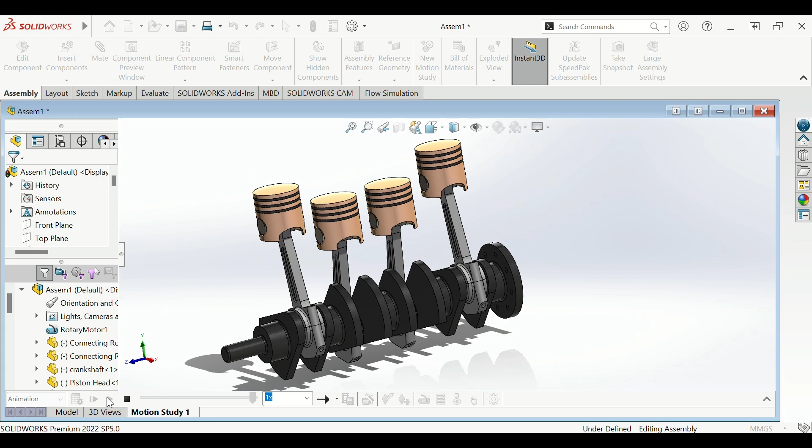Hello, welcome again. We are going to perform this type of modeling in SolidWorks. Basically, a four-piston crankshaft with connecting rods. And this is just a motion study case, but we're going to go ahead and navigate how to basically perform each and every single one of these parts.

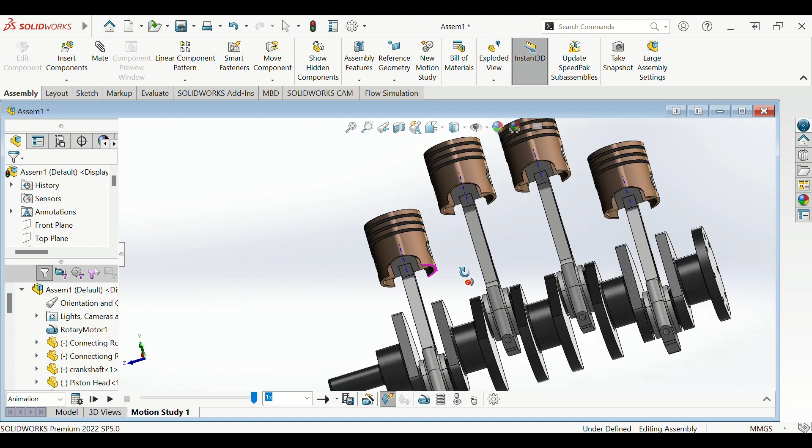And for those trying yours, here I just basically customized the color so that we can distinguish parts from one another. Okay, but if you're a person that loves engines and all this good stuff, you are basically an expert on what type of materials all these components are.

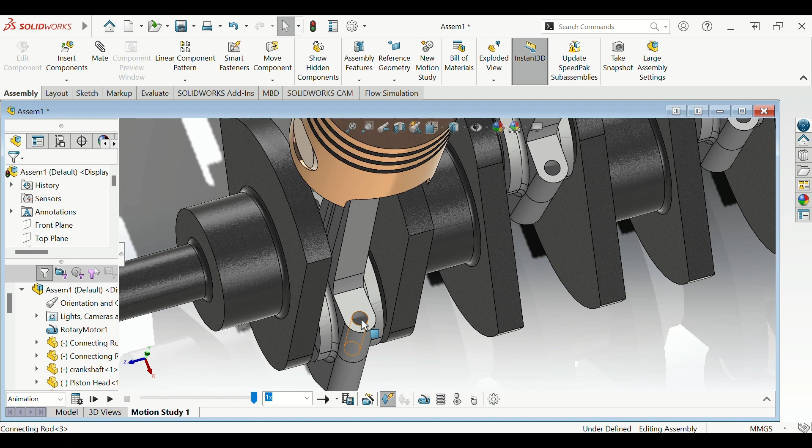And as you can see, we have holes here that are going to be missing either pins or screws. Either you have to thread them or not thread them. It's really up to you and your design, but this is what we're going to be working on. So stick around and stay tuned because we're going to start.

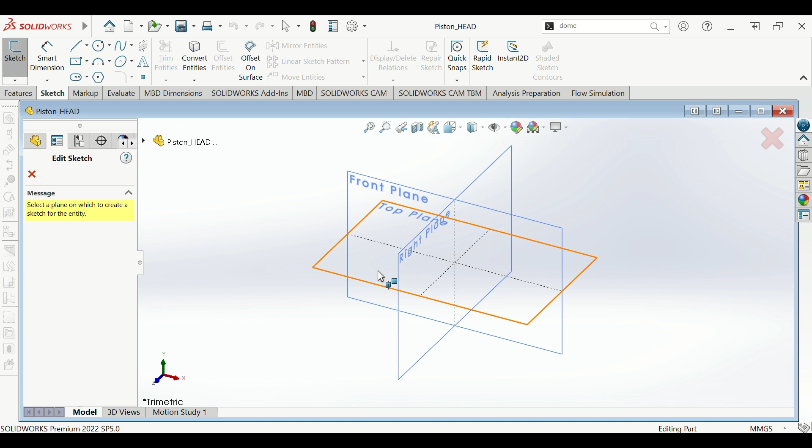So today I'm gonna open up my part in SolidWorks, and I'm gonna be using the millimeter gram second units. Okay, after I do that, then I'm gonna create my sketch, click on it, click sketch, and we're gonna use the top plane. Okay, top plane pulls up.

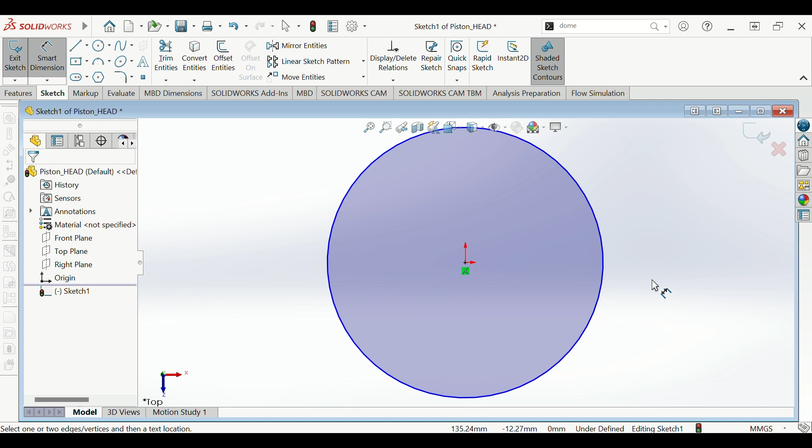All right, and if you're familiar with the piston head, it looks similar to a cylinder. So what better way than to use a circle to help us with that shape? So go ahead and create your circle. Make sure it's centered at the origin. And for this dimension, we're going to go ahead and use 85 millimeters.

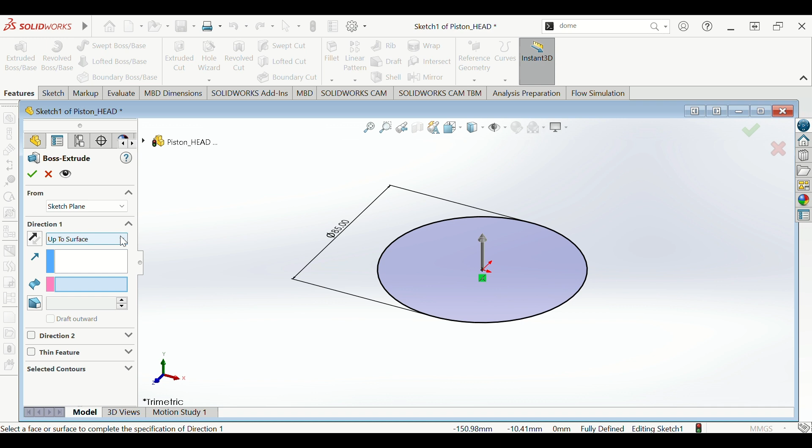Okay, now that we have it like this, we are going to use the feature of the extruded boss base, which is going to allow us to add material to our sketch. So from a reference point of our sketch plane, we're going to click the direction, and you have different commands here. So we're going to keep it with the blind one. Once you have that, your sketch kind of differs a little bit, with the yellow being a preview of what it's going to look like.

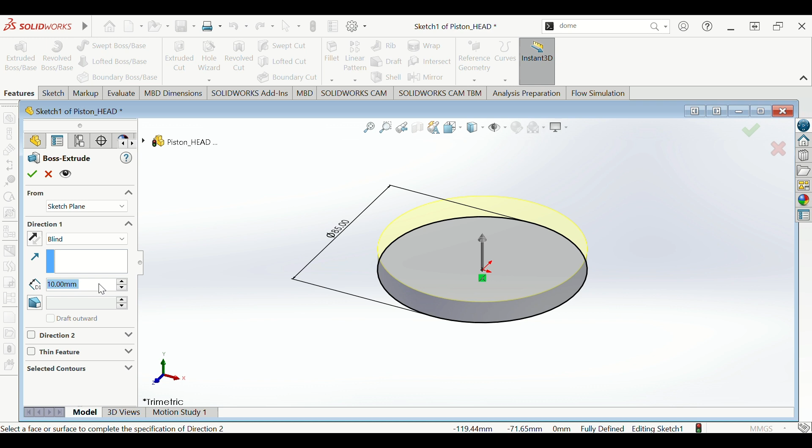So we have it set at 10 millimeters. We're going to go ahead and do it at 90. So let's click 90 millimeters. Okay, perfect. So that's what we're going to have, and that's what we like. So go ahead and click OK. Perfect.

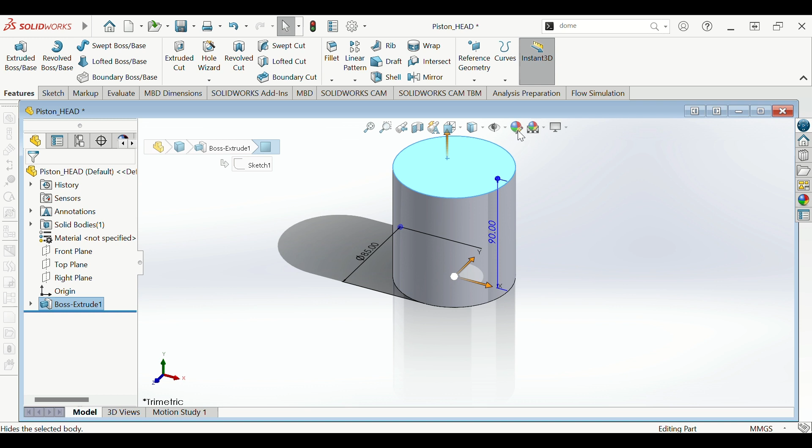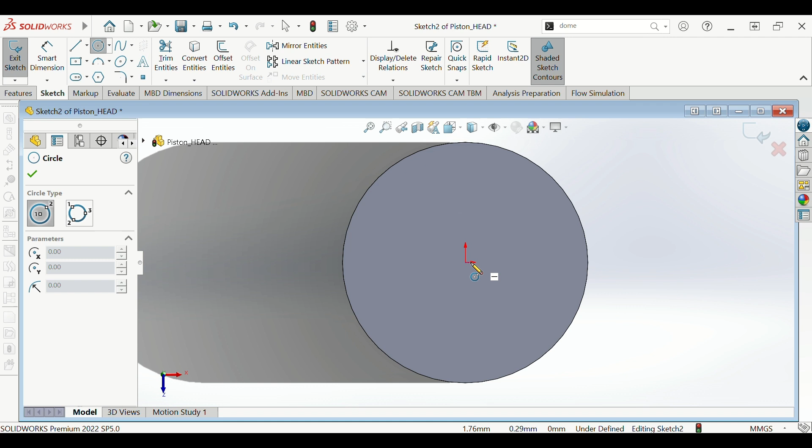So now the next thing that we want to do is create those cutouts for the piston rings. So here we have the top of the piston head. Go ahead and create a sketch. So press sketch, and then did it click out? No, it's still here. And then get the circle. Okay, make sure that it's in the middle. So concentric. I believe concentric means having the same center axis. Okay, so now we have this.

All right, so we're gonna smart dimension it, and let's see, we want our diameter to be 79. All right, perfect.

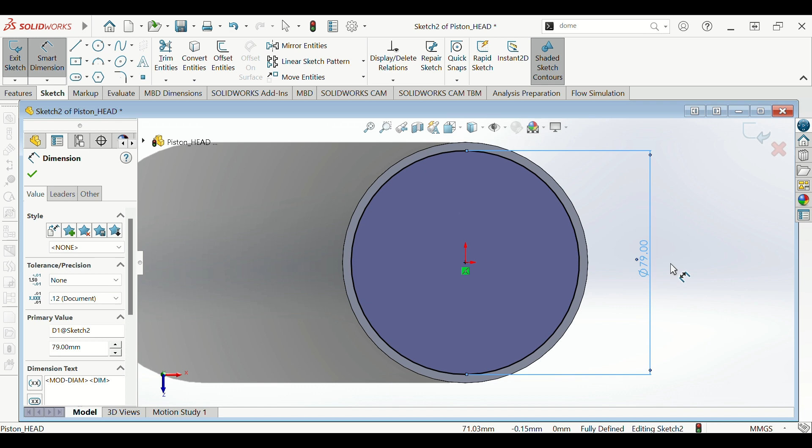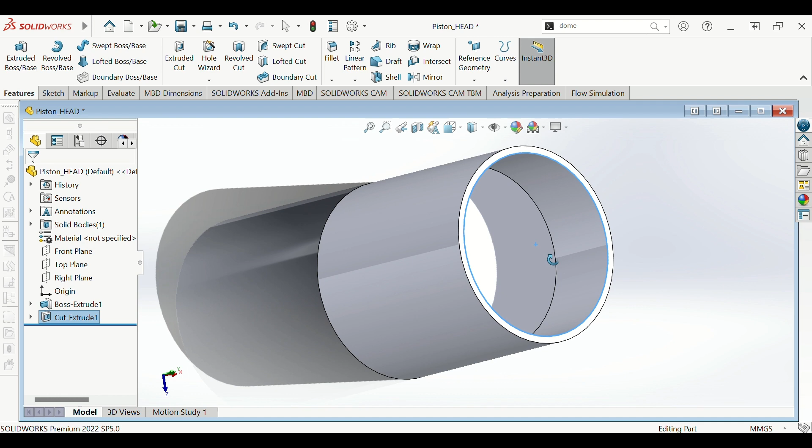Okay, so now the next thing that we want to go ahead and do is an extruded cut. And this is not your typical extruded cut that you're used to. So click on extruded cut. I'm gonna rotate it a little bit, and I'm gonna click this. Something you're familiar with, I'm gonna just do quick. It's something like this, right? Where it cuts super simple like that, but that's not what we want. So go back and edit our feature.

Okay. So our feature, we want to do it in offset. You have sketch plane, surface, face, plane, vertex, but we want to go ahead and click offset. Once we click offset, then it gives us an option of how far from the sketch plane you want it. So we want it to be, in our case,

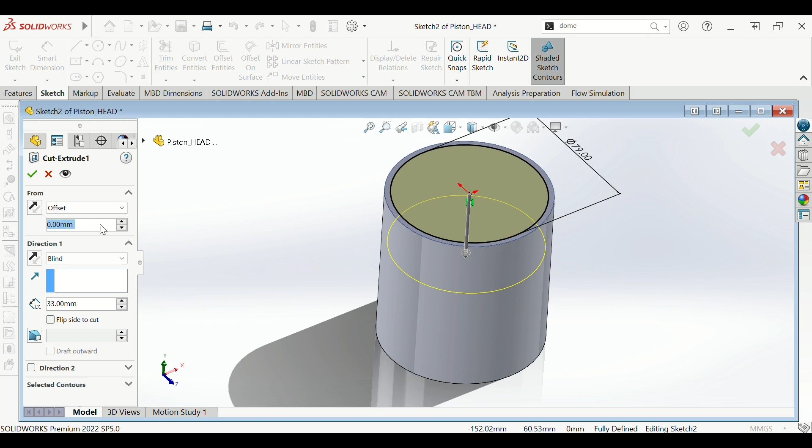7.3 millimeters. And you see, it's offset to the top, but we want it to the opposite side. We want it inwards, okay? And then direction of the blind, it's okay, we can keep that. But now for this one, it's gonna be 4.3. All right, cool.

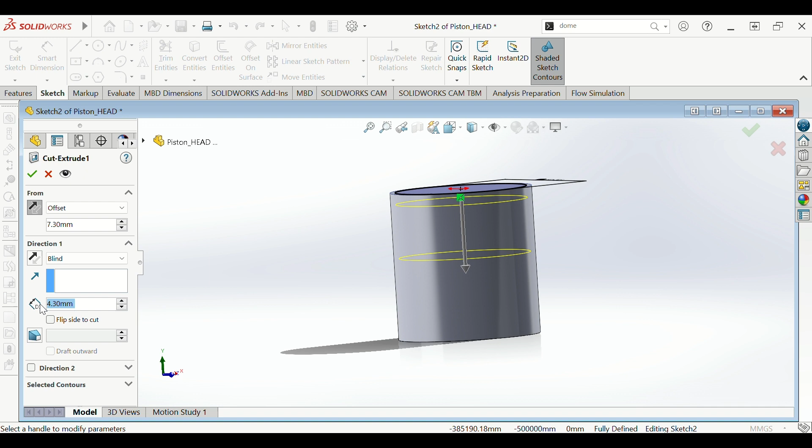And as you see, it's gonna cut from the inside, but we don't want that. So here on direction where it says 4.3 millimeters, it's gonna say flip side to cut. So we wanna go ahead and flip it. So now we have a cut towards the outside.

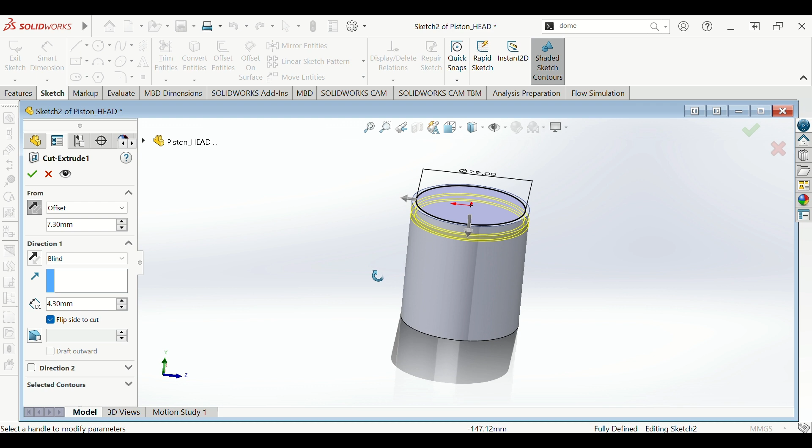Okay, so towards the outside of the sketch circle, I'm gonna press OK, and now you have this beautiful, nice cut for one of our pistons. Since we want 3 on our piston head, we're gonna go ahead and use the linear pattern.

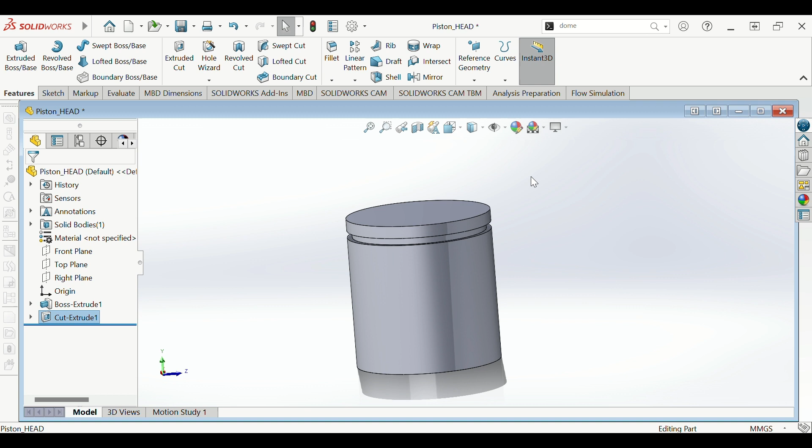But before we do that, I'm gonna click on the sketch, and here where the eye is at, we're gonna click this drop down menu and look for something called view temporary axis. Enable that to pop up because we're gonna need it.

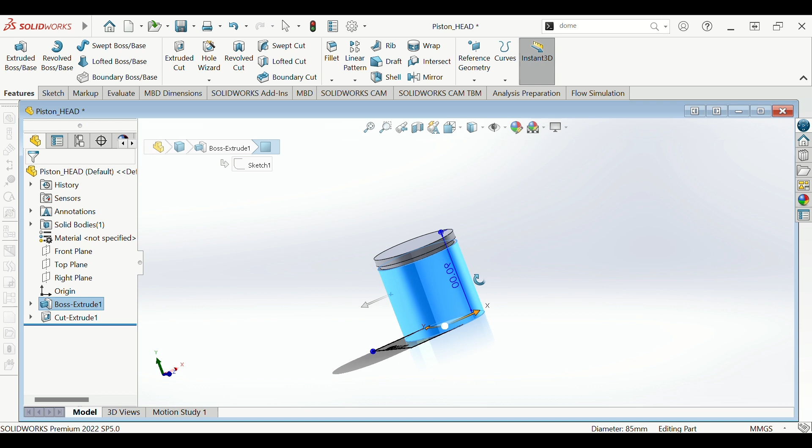Alright, so now you see the temporary axis shows right here. Let's do linear pattern. For direction, we're gonna go ahead and click the temporary axis. Now we have that.

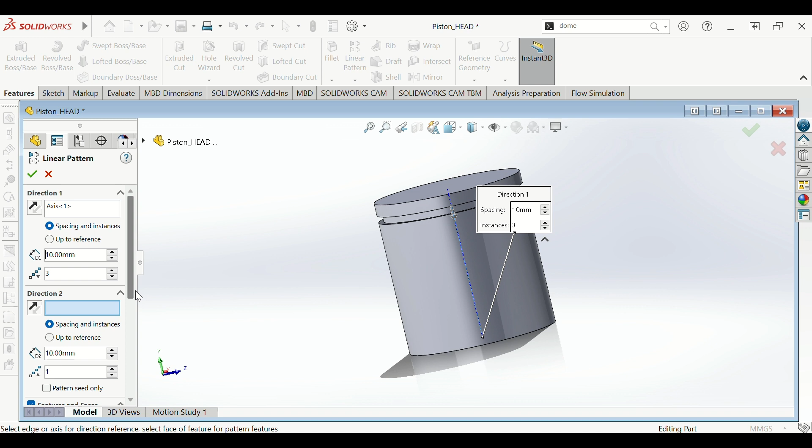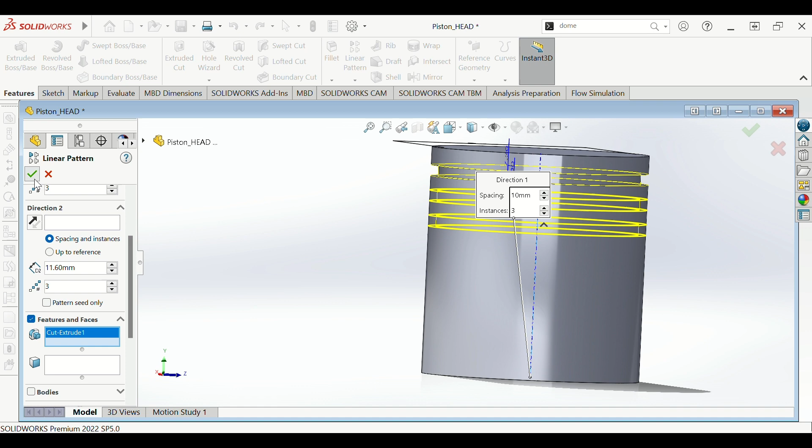Then for direction, let me see, where's the other stuff at? Features, is it here? Yeah, it's on features, what we want it to get done. The spacing, we want 3 of these. Automatically 3. But then the spacing is gonna be the 7.3 plus the 4.3 that we had, so 11.6 of spacing. Okay, now we have this beautiful, nice, good stuff for 3 piston rings.

Go ahead and eliminate the view temporary axis. Cool. And as you can see, usually pistons are kind of like, have a nice dome in here.

So where do you find dome? We go to File, View, Insert, let's see, Features, Cut, Features. Let's see if we can find the dome. If we can't find it, we can always go check if it's in curve. No, I don't know where it could be, but let's go ahead and search dome, which is right here.

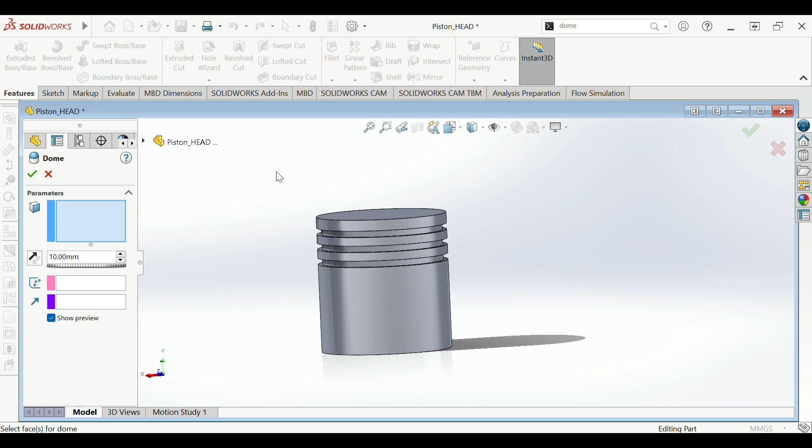Alright, so it's asking you where would you want your dome? Well, we want our dome to be at the top. Okay, so now you see this nice dome. But I think that's too much of a dome, so let's minimize it to, let's say, 5. Alright, that's kind of much better.

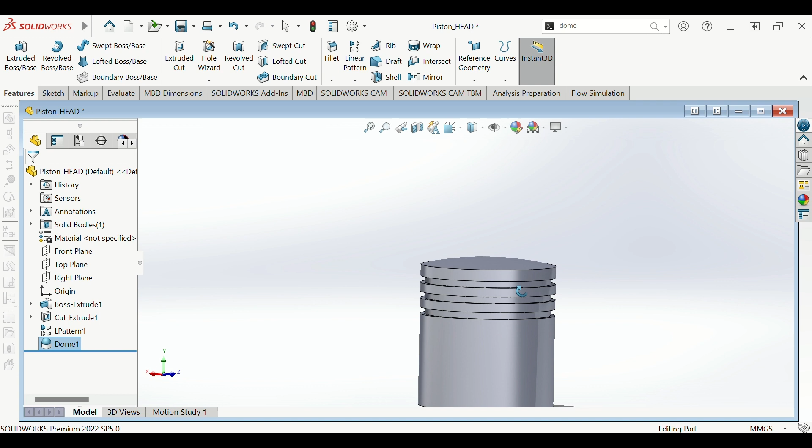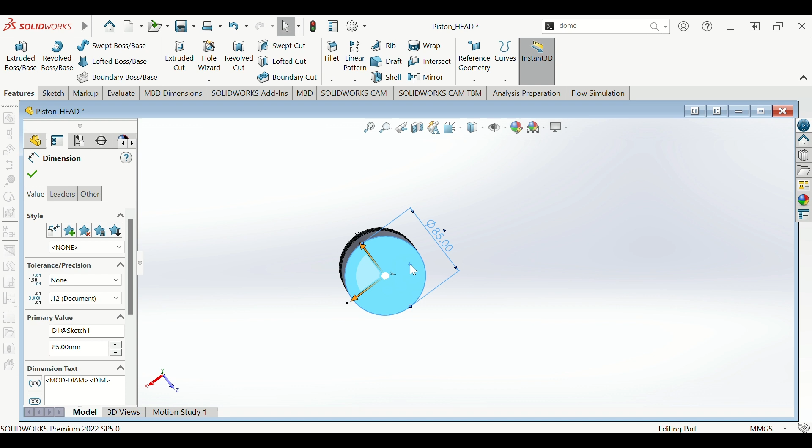Alright, cool, now we have this. So now the next thing we want to do is create other cutouts that we need, because how are we going to connect our connecting rod and pins, right? So here on the bottom surface, what is it doing all this stuff, perpendicular to this? Alright, so here we're going to cut out the inside of this.

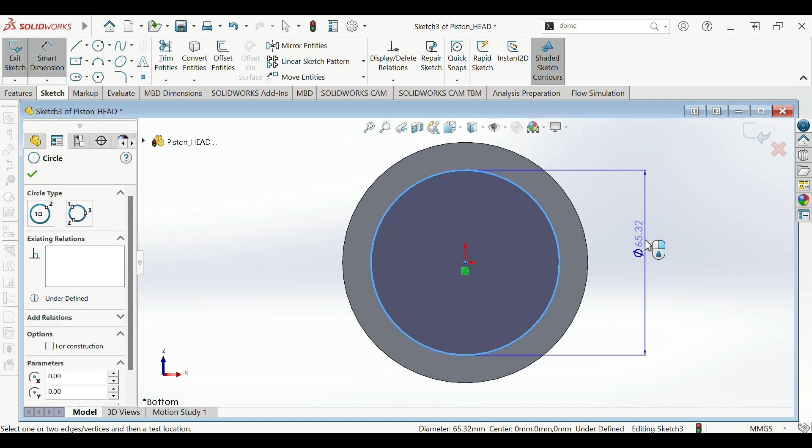So we're gonna go ahead and do sketch, circle, of course, and then we're gonna create this circle concentric to the origin and smart dimension it. What type of units should we do? So let's do 76.

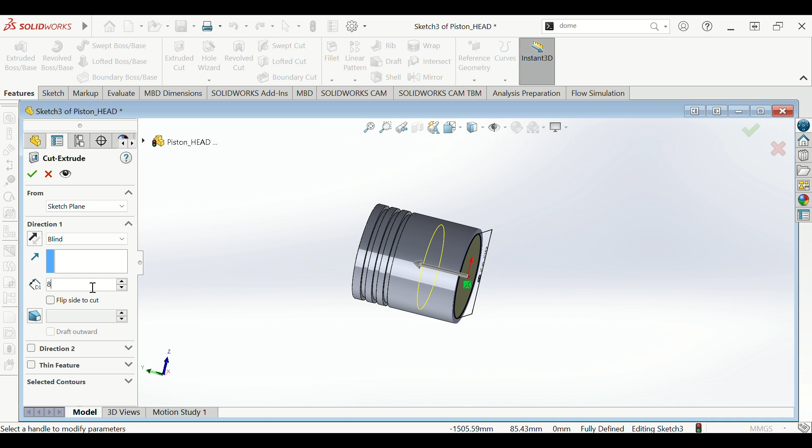Okay, and then now for this one, we're gonna go ahead and do a normal extruded cut. And the extruded cut should go all the way up to 85. Okay, alright nice, so now you can see that that's hollow inside there.

Alright, so now we're gonna move forward, we're gonna keep pushing. So let's see, front plane, top plane, right plane, front plane. Front plane is fine, this is normal.

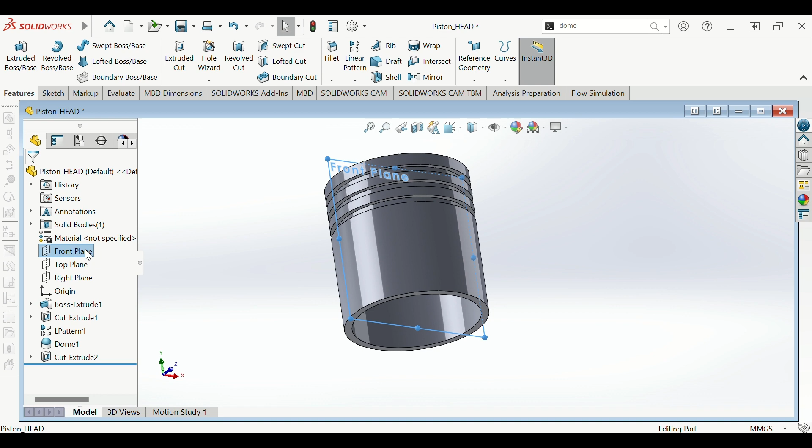Now we're gonna sketch a circle here where the piston pin's gonna go. So get your circle and let's line it up. It doesn't have to be perfect. You can always use geometric relationships.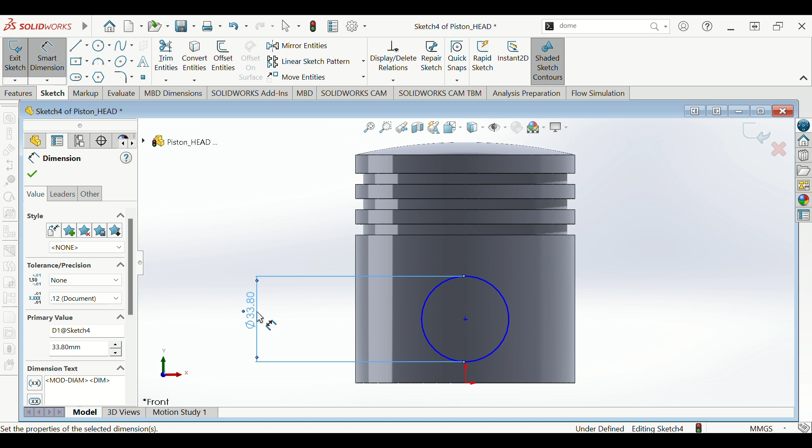The circle, we're gonna say it's gonna be 33.80. At the end of the day, all these numerical values come from your design, so you can always modify this. And then we want this from the center of the circle to the origin to be 27.

Okay, perfect. Alright, so what are we missing here? The only thing that we're missing is that it's not centered. So we're gonna go ahead and use the vertical relationship. Okay, now fully defined, now we're gonna go ahead and do an extruded cut.

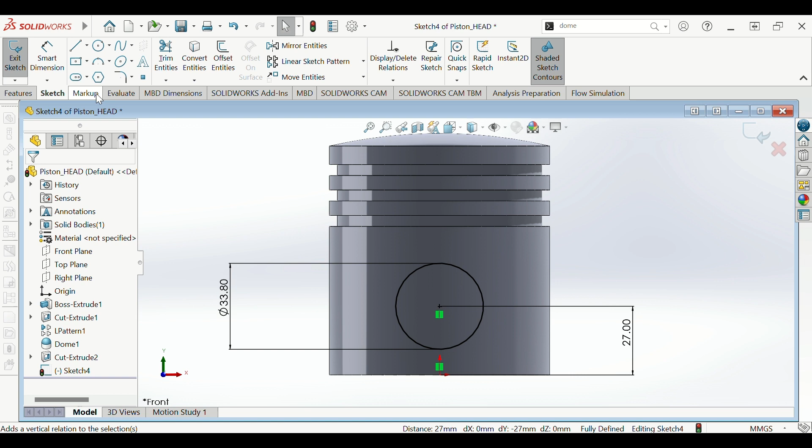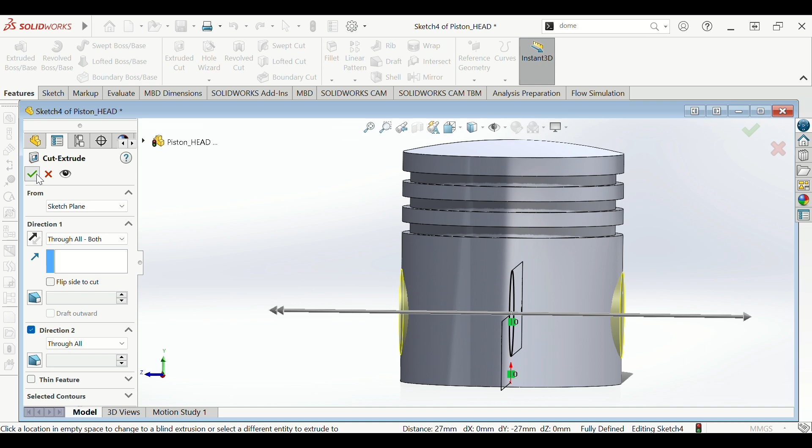And it's gonna be a through-all extruded cut. So we go ahead and do it through all. But sometimes it doesn't happen that easy, through all, because it's at the plane where the plane's in the middle. So let's go ahead and click again and do it through all both. And then press check, and then now you see that you definitely have cut out both of them.

Okay, so now we need some other stuff still. So we chose the front plane, now we're going to use the right plane. On the right plane, we're going to do some cutouts.

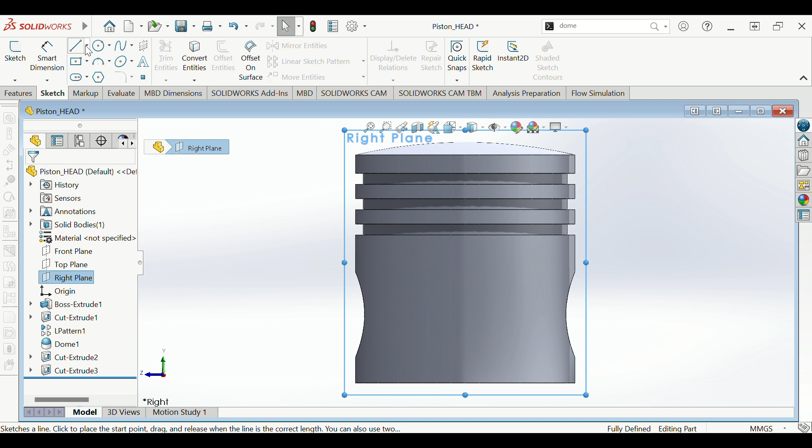Okay, so we're going to start off by doing the sketch, creating a center line. Center lines are really important because they allow you to know where you're at. Now that we have the center line, we're going to create lines, which I'm going to go ahead and do.

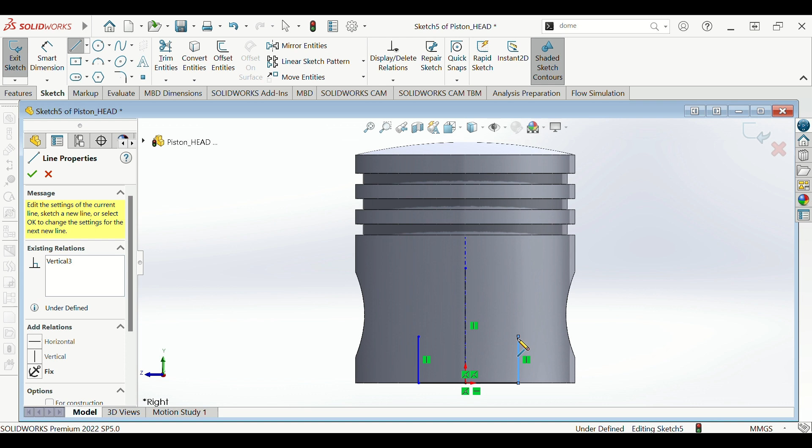You see how it's vertical and horizontal, past the origin, which is not coincident. Now go back up and see we can do the same. So, smart dimension it, and we're gonna go ahead and make this 50.

Okay, and then the difference between here and here, smart dimension, from here to this line, it's gonna be 25. So we'll make sure that it's right in the center.

Alright, the next thing we want to do here is to level up this one to become 12. But we also want to make the other one equal. So we press control, click here both, and now we have not the parallel one, but the equal one. Make sure that they're equal.

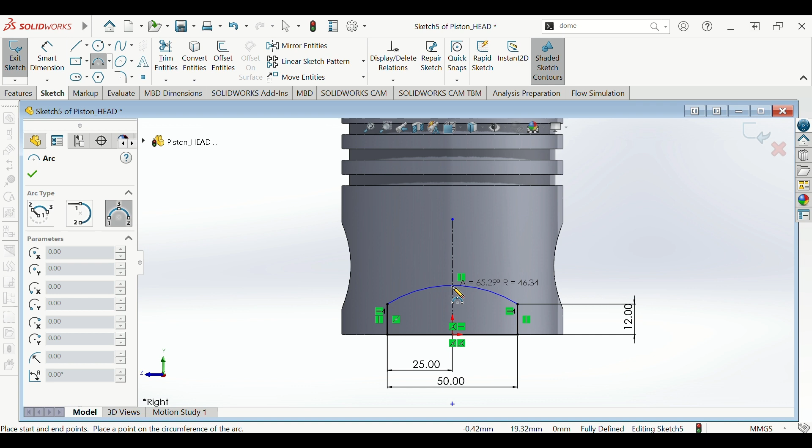Okay, now they're equal, and we're gonna go ahead and get the arc, the 3-point arc, because our radius for this arc should be around 40. Make sure it's at the center. Okay, 45, 50, 40, 55, around there. So now I'm going to smart dimension it so we can have the correct one. 40. Alright, perfect, so now everything's fully defined.

You see, you don't really have to smart dimension the center line because it's just used for construction purposes only.

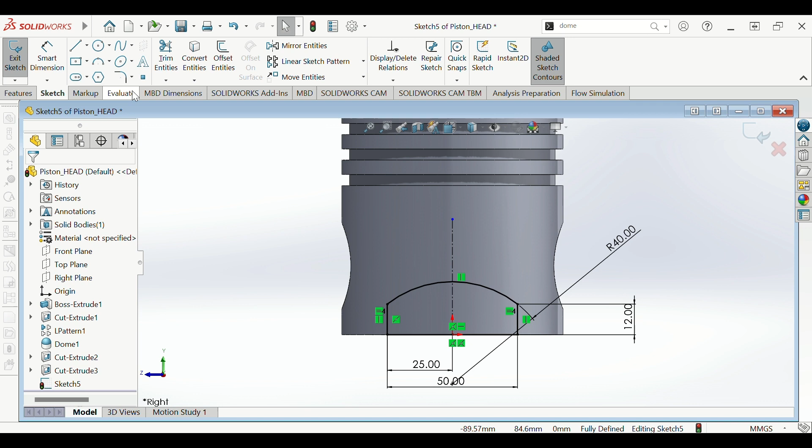So this we're gonna go ahead and do an extruded cut through all. Extruded cut. See both. There you go. And that's what we want. Okay, perfect, so now the piston head's coming along.

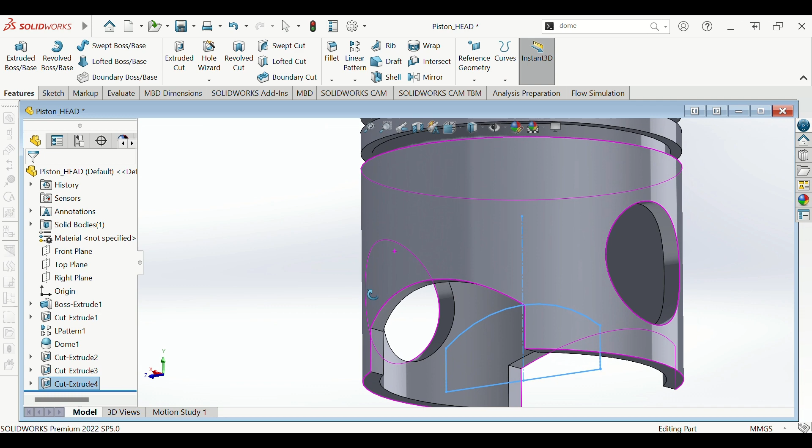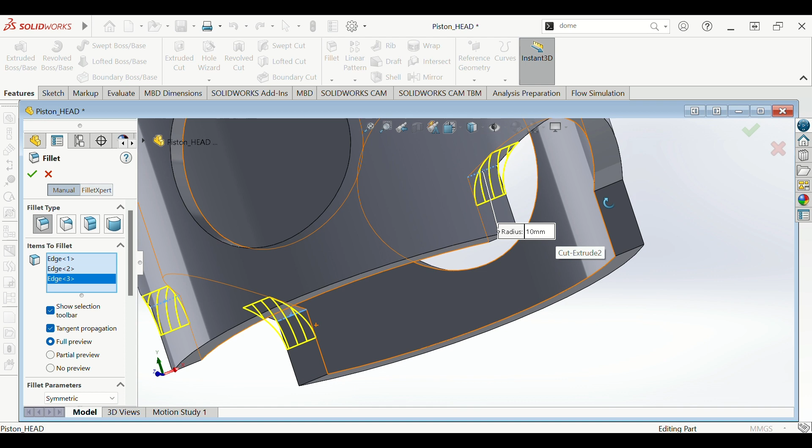And we're gonna create some fillets on these edges, on these four edges that we just did the cut on. Since we're already here, take advantage of this, and this, and where's the last one? Right here. Alright cool. And these ones are gonna become approximately a radius of 10 millimeters. Let's scroll down. Right, 10 millimeters symmetric. Okay boom, now you have a fillet.

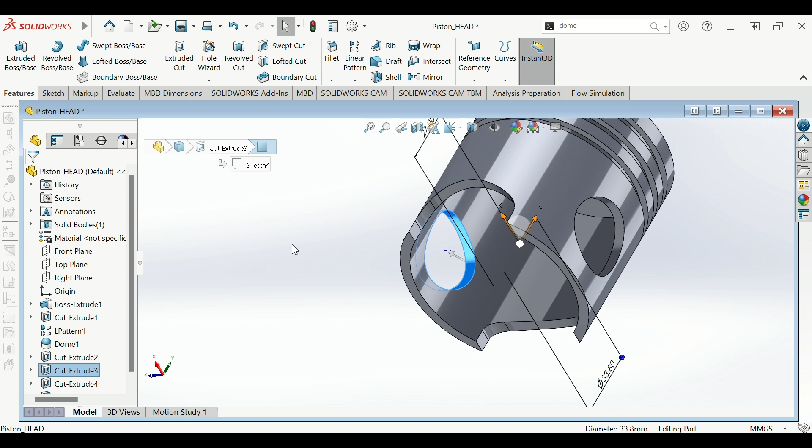But then one more thing, as you can see here for designing purposes, this circle right here, this little gap, it's not gonna be sufficient to hold your pin together, so you want to reinforce that.

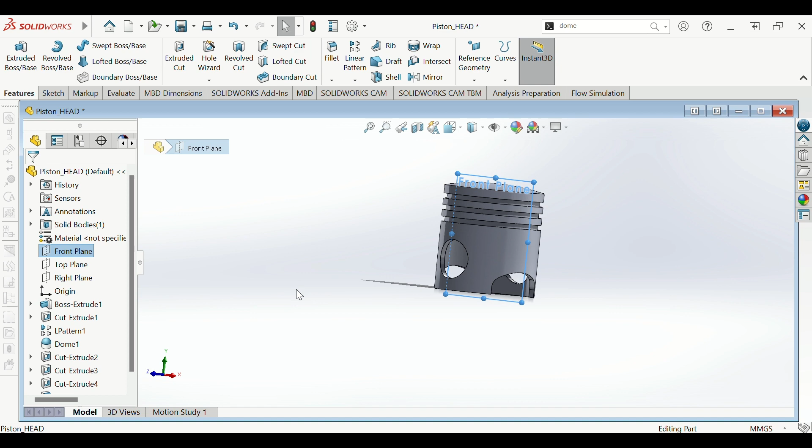So what we're gonna do here, we're gonna go to our sketch plane, our front plane. We're gonna create a sketch, but we're gonna go to convert entities, and we're gonna select this hole. It didn't allow me to do it, or what? Okay, let's start over again. Go to sketch on that plane that we selected, which was the front plane.

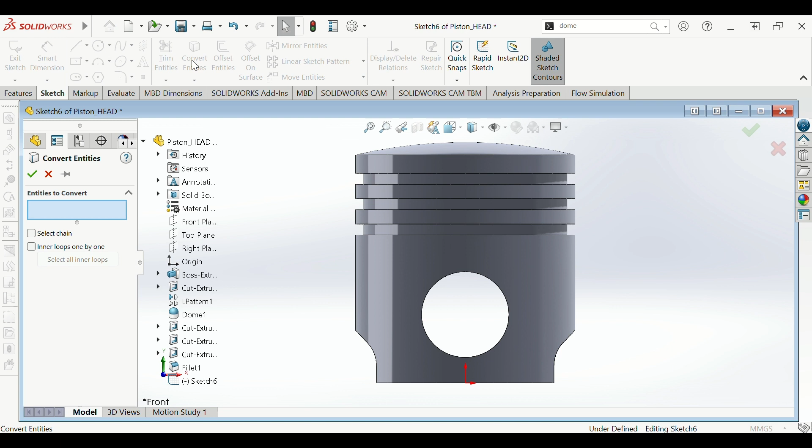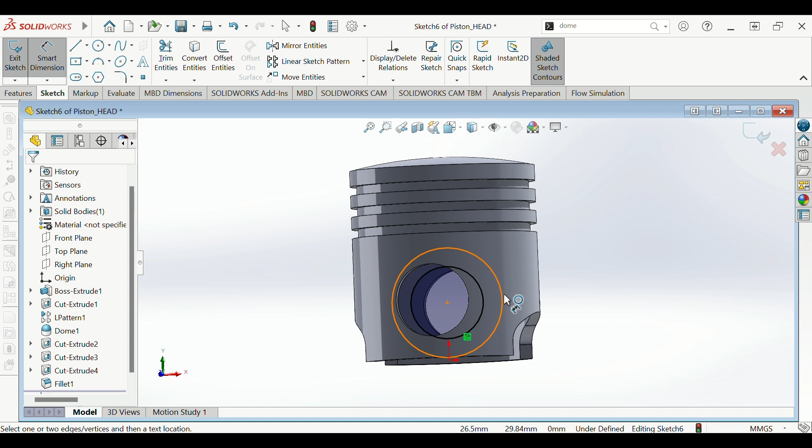Correct, convert entities now allows us. I want to select this circle, the edge. Okay so now we have it here selected. Now we want to create another circle within that one, concentric. So create the circle, smart dimension it. The circle dimension is going to become 45. Okay perfect.

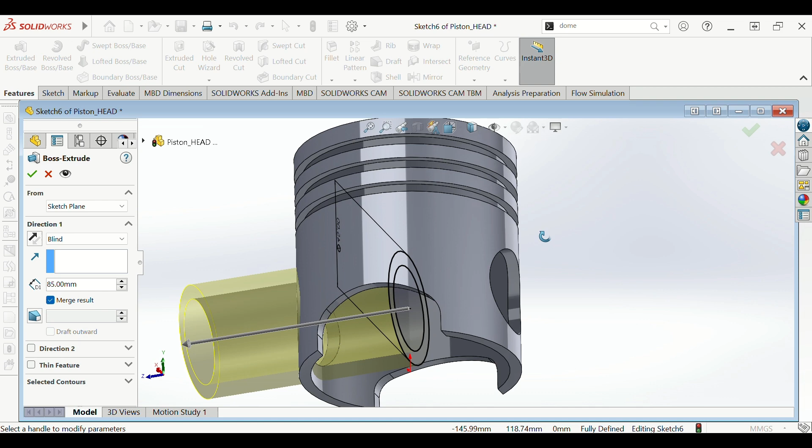Now you have this, and what we're going to do with this one is go ahead and do a boss extrusion, but we're going to do an offset. So go to feature, extruded boss base. Okay. That's sort of what we want, but instead of a sketch plane, we want to create an offset, because from the center on both sides it's going to be 38. So to offset it, we want to do 19. So now it's offset to 19, that way the other half is going to be 19, and it's going to be a total distance of 38.

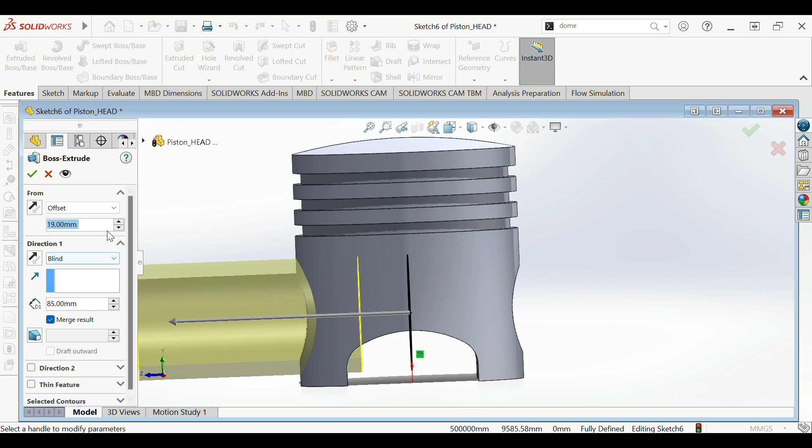And then for our direction, we're not going to use blind, we're going to go ahead and go through up to surface. So now you just pick what type of surface you want it to go to. We want it to go to the outside of the piston head. Okay, press OK, and let's see if we got it right.

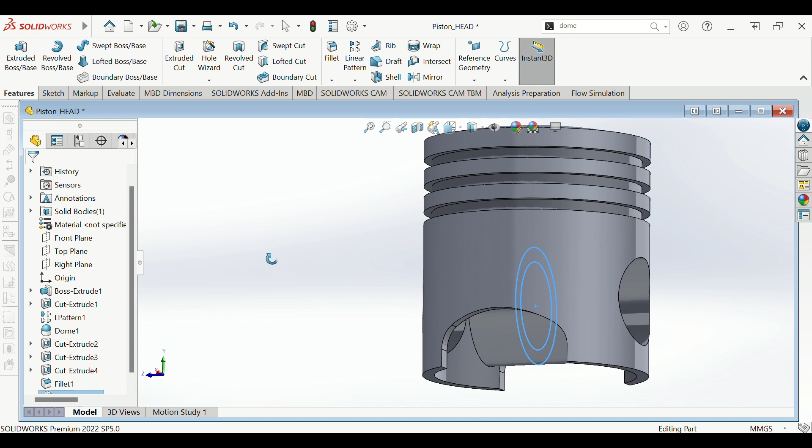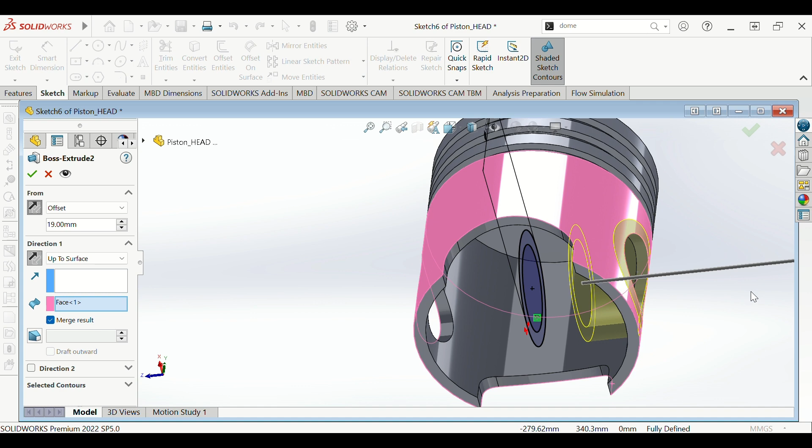No, we didn't, because it's on some other side. You see, that's not the side that I wanted. So go ahead and edit. And there we go, that's what we wanted. Even though it's on the wrong side, it's fine, we can work with that because we can mirror the other side. Alright perfect, so that's what we're looking for.

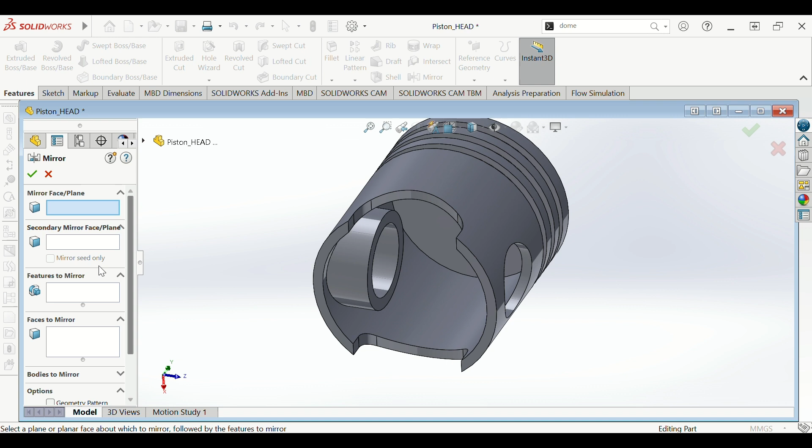But the next thing I want to do is create from the same sketch, the other side, or you can also mirror. Let's see, we can just take the feature, which is going to be the boss here, and then mirror along which plane, which was the front plane. So now you have that, and now we have these pieces.

So that's how you do a typical piston head.

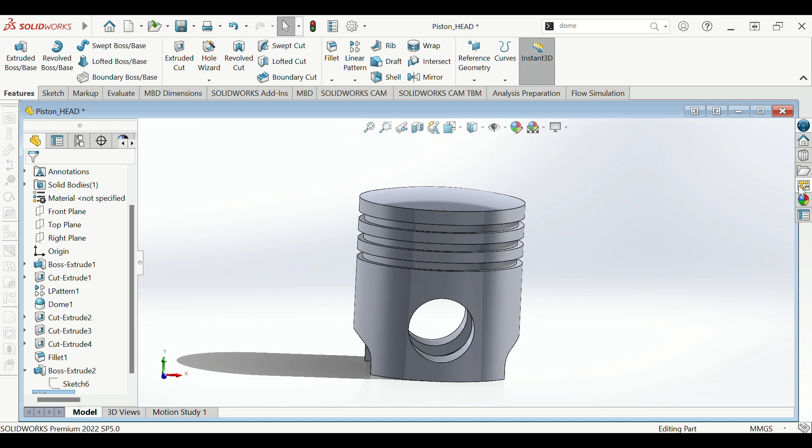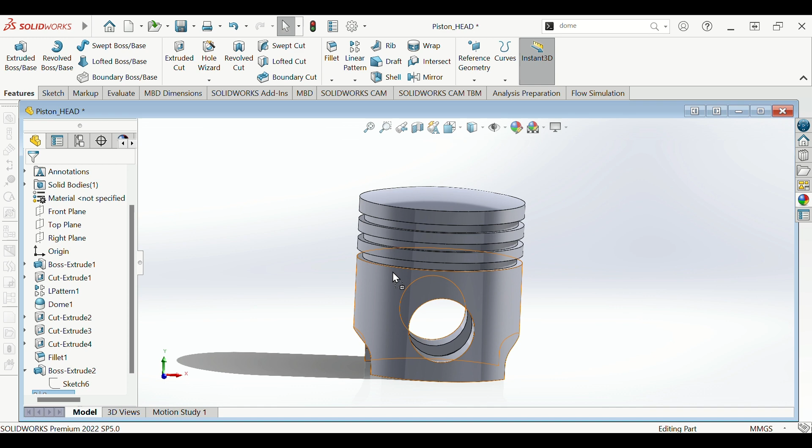And now you can create your colors. Let's bring this to the other side. Appearances for plastic, metals, acrylics, rubber, painted metals. So for whatever color you want to use, polished bronze, let's go ahead and click it here. Appearance filter, so now you have your filter, and it might be too shiny, but that looks nice.

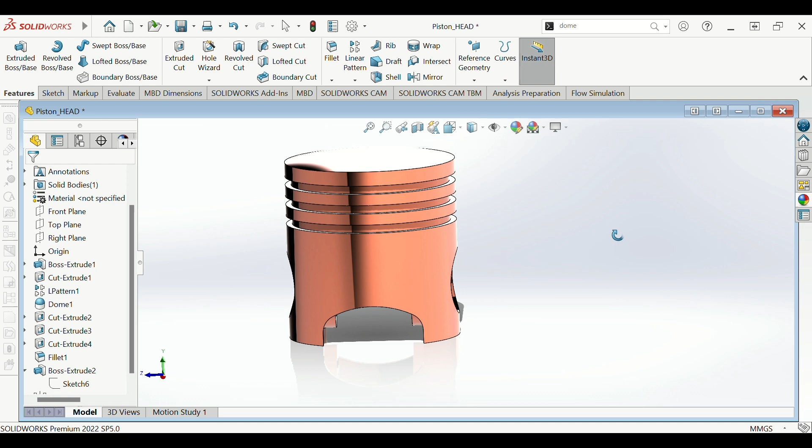And that's basically how you do your piston head. Stick around, because we want to go ahead and continue and do the whole cylinder that we had.